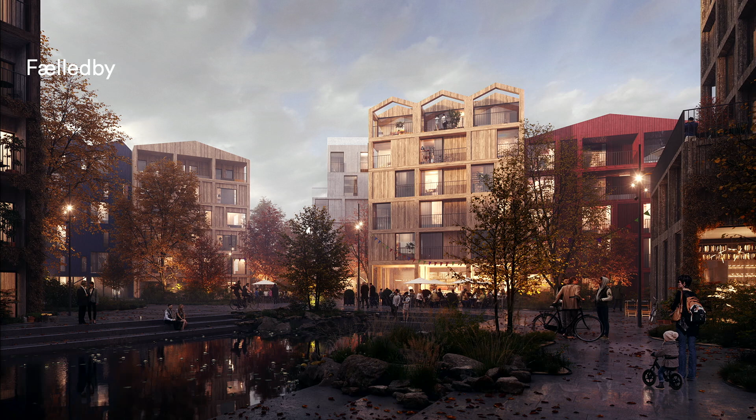So when we talk about visual programming, I'll give a couple examples of this. We do a lot of projects like this - it's a housing project, lots of buildings, lots of apartment types, and one of the deliveries is area calculations. Area calculations mean a piece of the public areas has to be added to each of the apartments in a building. Typically, we've done this manually.

We've taken all of the area information out of a project, then exported it into Excel. Somebody runs the manual calculations while the rest of the team is drinking coffee to see if we've met the requirements, find out we don't, and then they go back to work.

So we start working with all this data and visualization in the project, but we want to do this in a smarter way - a way that we can be designing and checking the area calculations on the fly. One of the team members on this project happened to think about it like: okay, if we can outline the steps we need to take to make this calculation...

First, we need to calculate all the areas. We need to count up the apartments. We need to total the areas of all public areas, divide the public areas by the number of apartments, add that back into the areas, and write that back to the model.

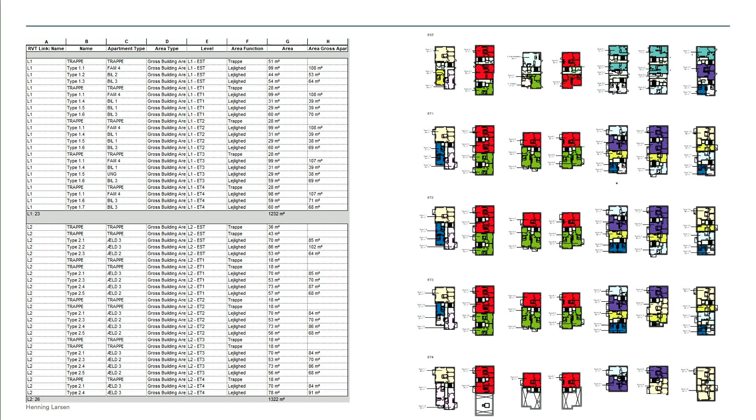So within a couple of hours, we had created a Dynamo graph that could do this calculation automatically. The benefit of this is we didn't have to stop the process - all we had to do was click run.

But of course, our designers don't want to see the spaghetti diagrams, so we made this even simpler for them. We made this in Dynamo Player, so all they have to do is push a button. They don't see anything that's happening in the background, and these calculations calculate automatically.

Then we took it also to the next level and started to visualize this data that we were getting out of the project. From this, the project manager could start to slice and dice the project to find out where the apartments were, how many different apartment types we had, where the areas were above or below the requirements - all of this visual.

Architects and visualizations are key, because if I give them lots of numbers, they're not going to look at them. If I give them graphs and charts and ways of slicing and dicing the data, then they start to use it. So the next project I'd like to tell you about is this World of Volvo.

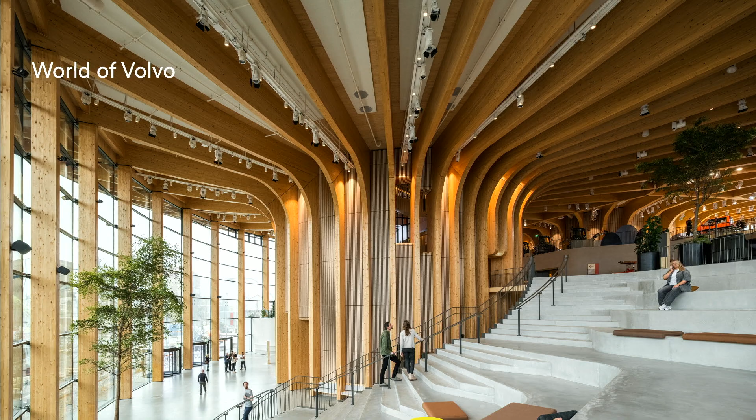It's a project we just completed in Gothenburg. And if you're ever in Gothenburg, you have to see this building - it's amazing, I was there over the summer, you have to see it. It's a CLT, or cross-laminated timber project, and it's huge.

When we were early in the design process, one of the designers had an idea - we were going through masses and lots of design iterations of this project. It's like, can we script this so we can easily make design iterations quickly?

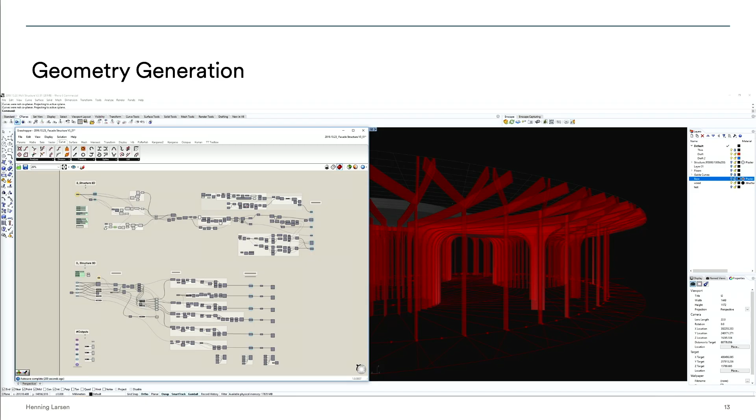So he took this project and created a Grasshopper script that basically mimicked the geometry of the project. This enabled the design team to start to stretch and move the project around with a few sliders in a Grasshopper graph. In the end, we had this model that we can actually, just by sliding around in the Grasshopper graph, refine the geometry.

But this graph actually lived way beyond the end of the design phase. It was handed off to the fabricator for the wood and the steel, and it was used to generate the geometry of the project for fabrication. Then when it was brought onto site, we had pretty much a flat pack cross-laminated timber that had to be hoisted into place.

Then when we come up to the next level of scripting, we add another level of complexity, and these are typically tasks that we can't do with visual programming. The idea is that we use a lot of scripting for calculations of environmental factors on a building - daylighting, microclimate, paths around the building.

But we've also decided that we could take this one step further. We can use this data to also turn it around and help us generate the geometry of the project. And this is something you can't quite do with visual programming.

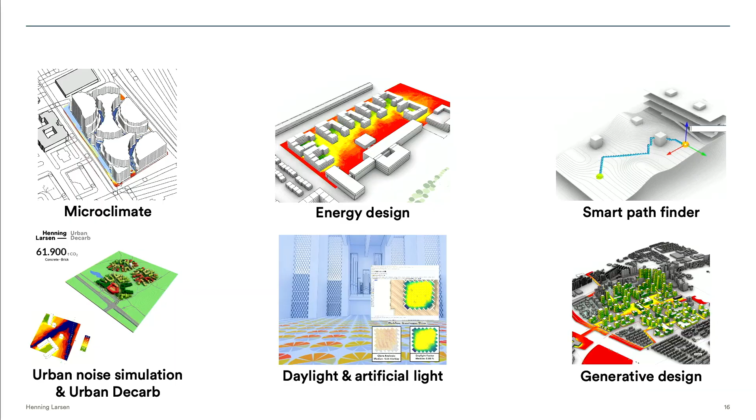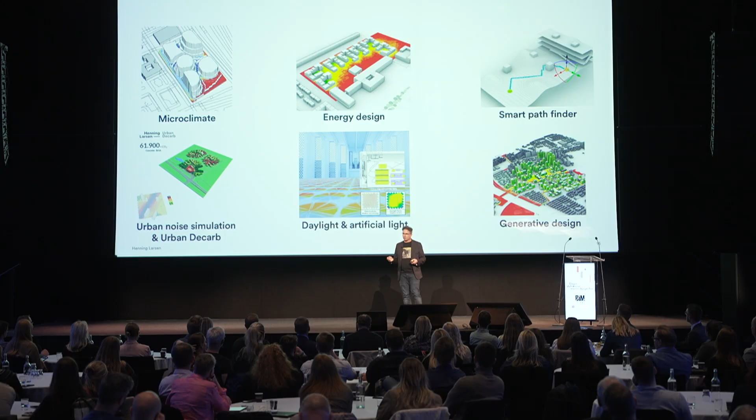It's typically too complex, and visual programming is also a little bit slow. So we had the ability to take the information from our design analyses, turn it around, and find out what the massing of the projects is. We're not looking at final design solutions, but suggestions so we know the project is moving in the right direction.

Then we have these generative design graphs, where we can use programming and a few sliders to control the outcomes and also set up the goals in the project. So we can quickly run through hundreds or thousands of design iterations and develop the best massing of the project. Once again, these aren't the final designs, but they give us a good head start on the project.

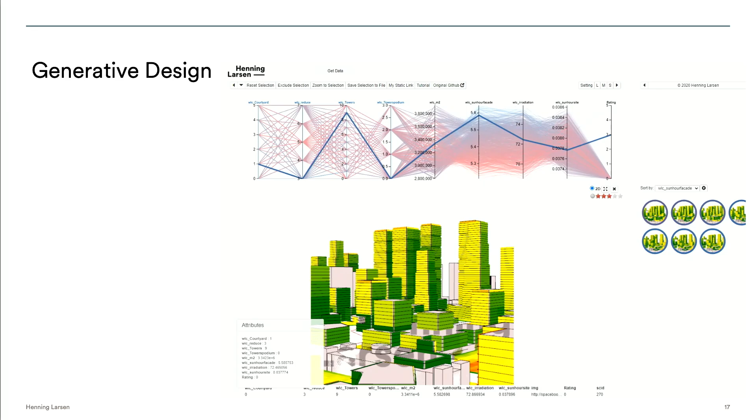Then the next level up from this is add-ins. We actually haven't designed that many add-ins. The ones we've designed are mostly to help our users use the tools we have in the way we want them to be used. So we've developed add-ins for both Revit and Rhino, our two primary tools. What they do is direct users to the information we have so they can find answers to the questions or information they need when working on a project. That's kind of the extent of the add-ins we've done.

So now I'd like to take this up another level to applications. When we talk about applications, this is something not necessarily fit for a specific piece of software, but something that can bridge multiple pieces of software.

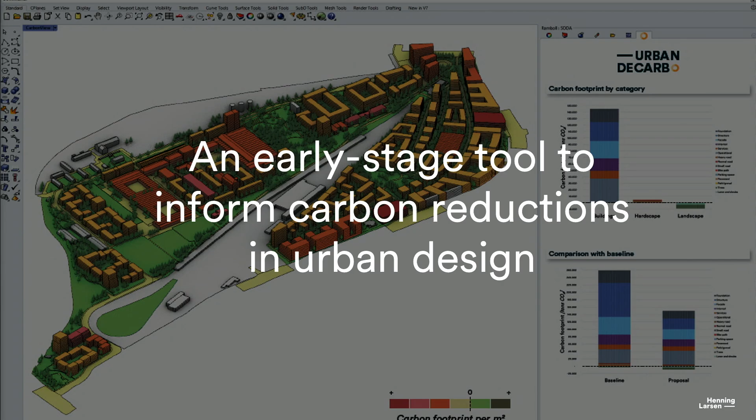We can start with a baseline of the project, just a basic site. We can go out and find out what the surrounding buildings' constructions are, and calculate a rough carbon calculation on that. We can look at the urban context of the site. We can say, what happens if we change a parking garage for a park? What happens if we minimize the amount of concrete paving that we use? We make all of these assumptions and get a final calculation of the carbon impact of this urban design project.

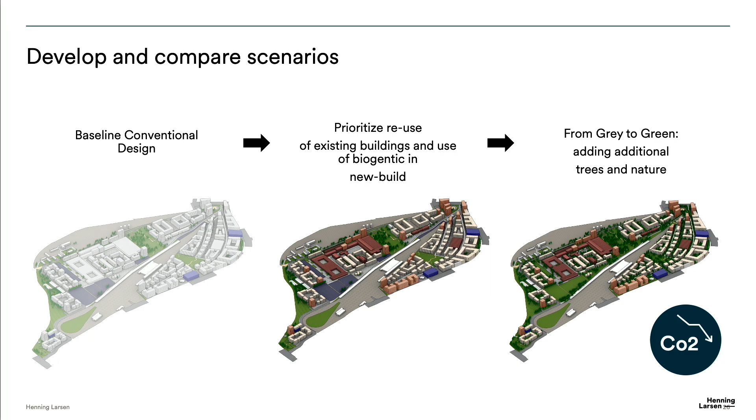I think this is also where the future is going, because we shouldn't only be looking at the buildings. We need to be looking at the buildings that we design in the context as well.

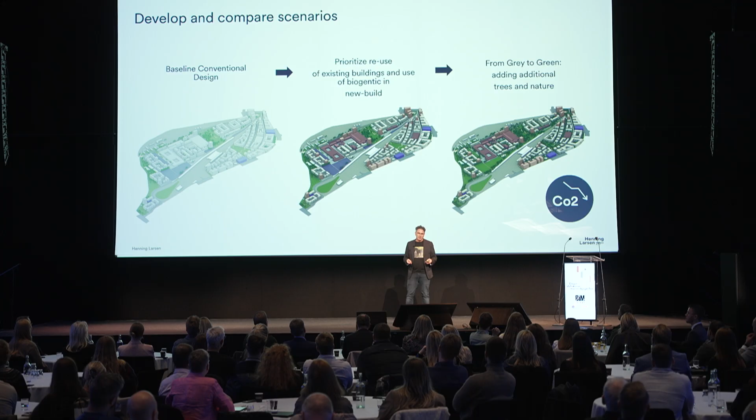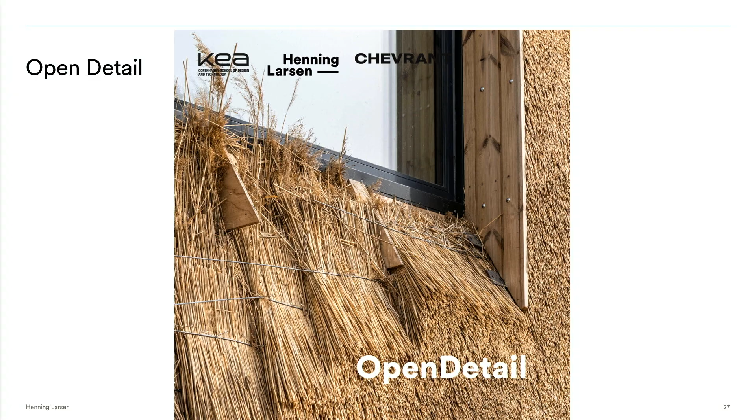This last project is something we've just recently started, called Open Detail. The idea is, how can we create an open source sustainable detail database? This started as an idea in our office. We took it to the AEC hackathon in Copenhagen, and it won one of the prizes. Now we're developing the front end and the back end of this tool, hopefully having it ready in the next couple of weeks. We have some legal issues with it, but we'll get those sorted out over time.

The idea is that we've experimented with several different building material types - cross-laminated timber, hay bales, mud, and multiple other materials - and they require a different set of details. So the idea is, how can we make these details available to others? If they have interesting details, maybe you have a sustainable method in Iceland that we can add to this database so it can be available for others who are curious about those construction techniques.

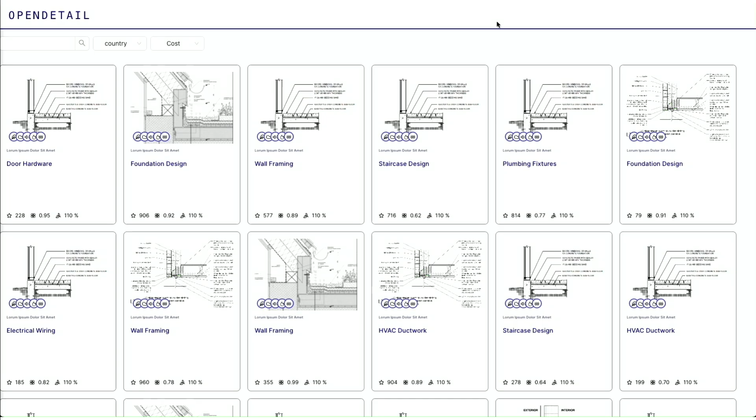A lot of these are old construction techniques, maybe 200 to 500 years old, that we're reinventing because we know back then it was a sustainable solution, which means it's a sustainable solution today. We just need to modernize it for the modern building industry. So it's really a valuable tool for us to share our knowledge and also get other people's knowledge as well.

I'd like to start to end this on AI because everybody is talking about AI. I thought it would be a good idea to show you how we use AI right now. We're also looking into the future for additional use cases and finding the best possible way, but we want to do it in the right way in the future.

The first step we're doing is, many of you are also using these large language models. So what we've done with Ramboll is created something called RAM-GPT. It's basically an inward-facing large language model. This means we can put project information, documents that shouldn't be made public, into this large language model and get the results. So it's a closed system. If we put those documents out into ChatGPT, then they would be made public. So this is more inward-facing, it's more secure, and we have more confidence using a tool like this.

We can use this for summarizing meetings, reviewing documents, summarizing documents, writing texts, and it's all based on what we've written in the past within the company. So it's not going out - we're not going to get a document from BIG or C.F. Møller or another architect. This is all going to be Henning Larsen and Ramboll data that it's based on.

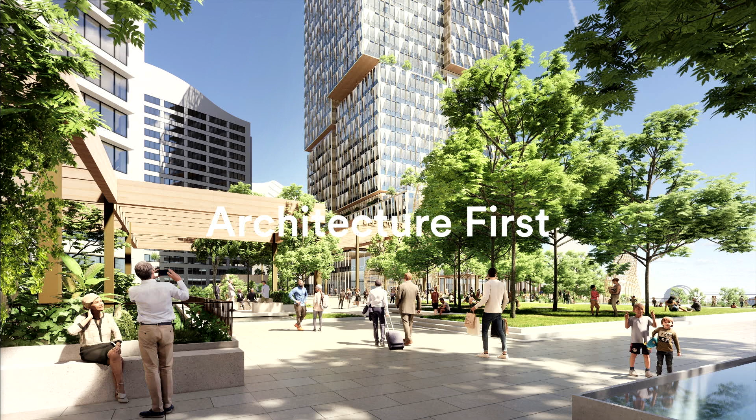With all of these tools, we have an idea at Henning Larsen, and the idea is that it's architecture first. We want the designs to come out the way we want them to. We don't want to make sacrifices because the software couldn't do something—if the software doesn't work, we'll find a way to make it work for us.

So that pretty much concludes what I had to tell you about how we work at Henning Larsen. I don't know if I have a couple of minutes for questions, or if we need to move on.

Yeah, we have—we might have time for a question. Thank you so much for a great presentation.

As I mentioned before, you probably have a reputation of working quite smart already at a Danish architecture firm, but working even smarter now. So maybe just a general question about your final note on AI: how do you expect AI to be used in design and construction in the future?

Yeah, I think it's going to help us make better and more informed decisions. It's also going to help us plan our work much better and more effectively. I don't think it's going to take away the tasks of designing a building—it's going to help us design a better building in the end.

But do you dread at all that the spontaneous nature of designing might disappear with all these smart decisions and planning? I'm kind of worried it's going to go even faster, because now we can get more results faster than before—all that research time is at our fingertips.